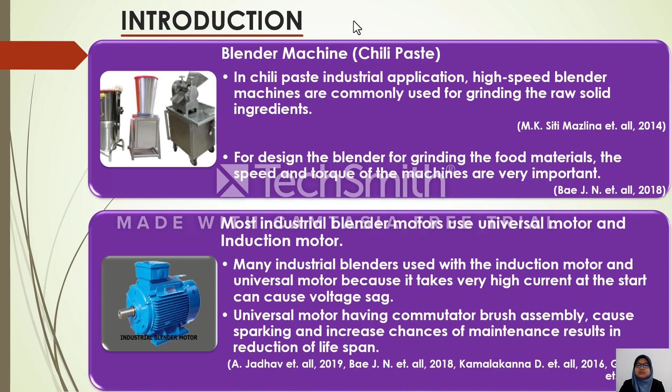Why is the BLDC motor used in this study? Because it is considered due to its high speed performance, suitable for high speed applications of 10,000 rpm to 30,000 rpm, capable of giving the easy speed torque control required for a blender.

Most BLDC motors are used for small applications, which are home appliances, widely used in high-speed blender machines instead of brush motors due to the high efficiency and good performance. Various experiments were carried out on a commercially available mixer grinder for household application.

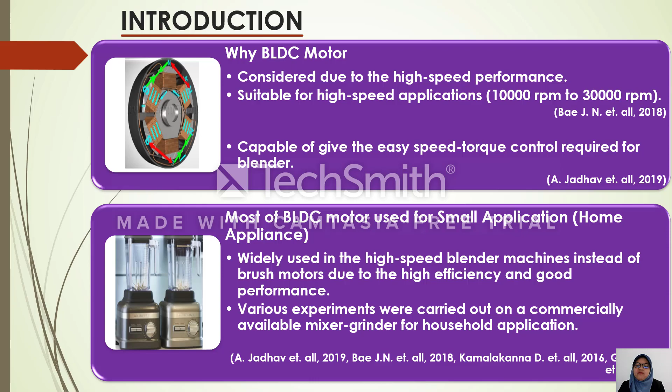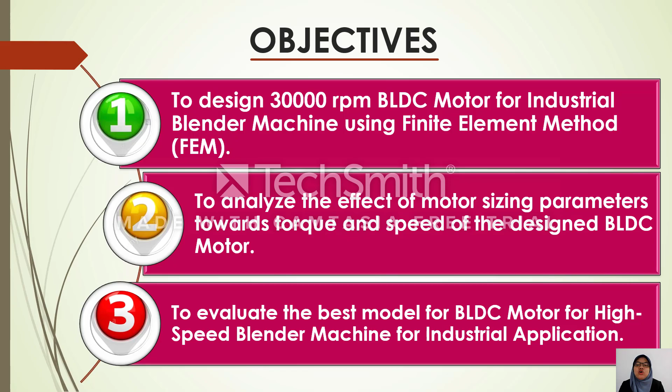These are the objectives of the study. To design a 30,000 rpm BLDC motor for an industrial blender machine using the finite element method, FEM, then to analyze the effect of motor sizing parameters towards torque and speed of the designed BLDC motor, and to evaluate the best model of BLDC motor for a high-speed blender machine for industrial application.

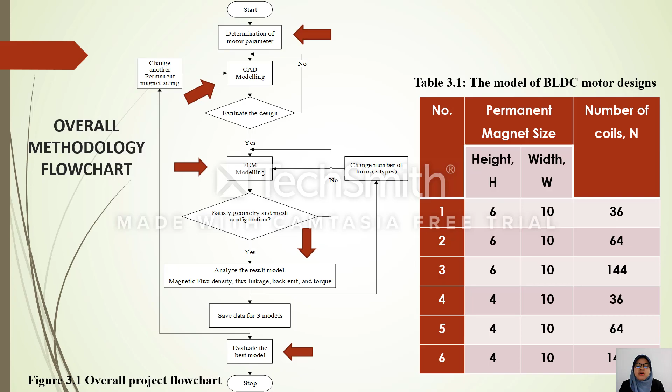So this is the flowchart for the overall methodology to design the motor. In this study, there are 6 designs of motor according to 2 sizes of permanent magnet, and each size has 3 numbers of coil, as shown in Table 3.1. Figure 3.3 shows the measurement of the motor structure design.

Figure 3.2a shows the front view of the motor design. Figure 3.2b shows the side view of the motor design. Table 3.2 shows the BLDC motor fixed parameter specification design, while Table 3.3 shows the BLDC motor variable parameter specification design.

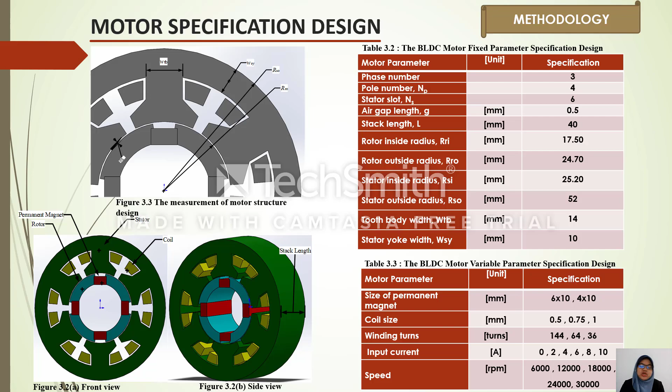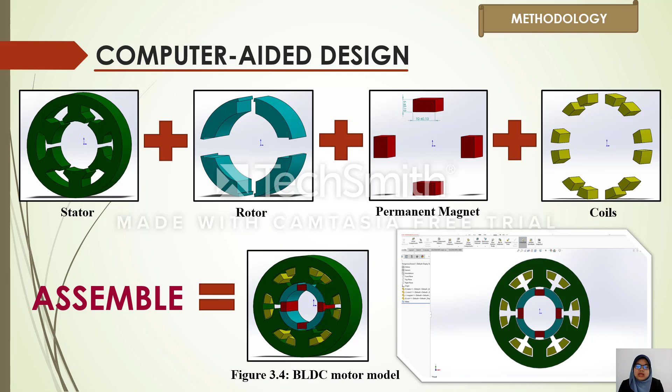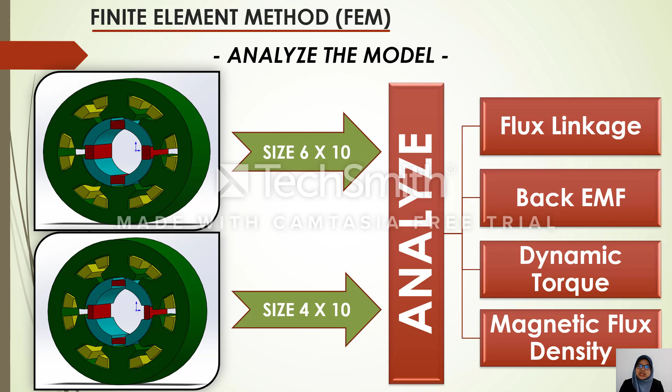Computer-aided design is used to design every single part of the motor structure, such as stator, rotor, permanent magnet and coil, before being assembled as the motor geometry. To operate the motor and analyze all the models, the finite element method is used in this study. In this simulation, the effect of flux linkage was observed for all models with a zero input current condition.

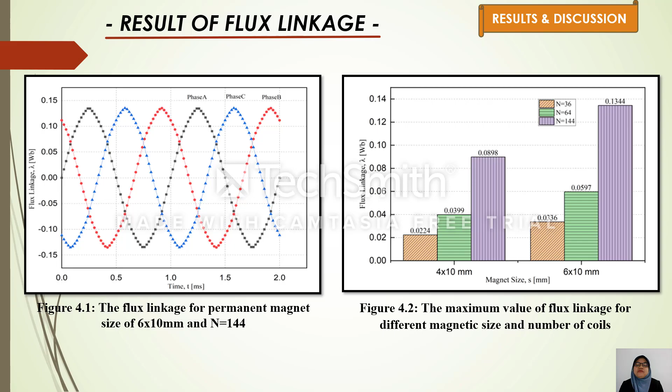The back EMF for all models was observed in this analysis for zero input current. Figure 4.3 shows the motor back EMF at 30,000 RPM for a permanent magnet size of 6 × 10 mm with 36 coil turns. It shows the maximum back EMF achieved in a balanced three-phase sinusoidal waveform at 208.7566 volts.

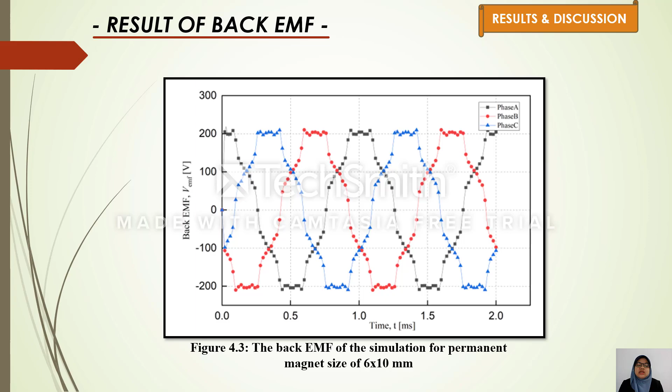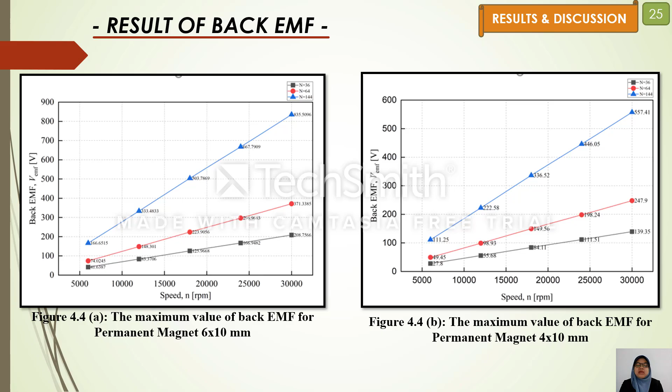Figure 4.4a and Figure 4.4b record the maximum back EMF based on various permanent magnet sizes, numbers of coil, and motor speeds from Figure 4.3. According to the result, the back EMF increases proportionally with the increase of speed, and the size of magnet and the number of turns can also affect the back EMF induced in the motor design.

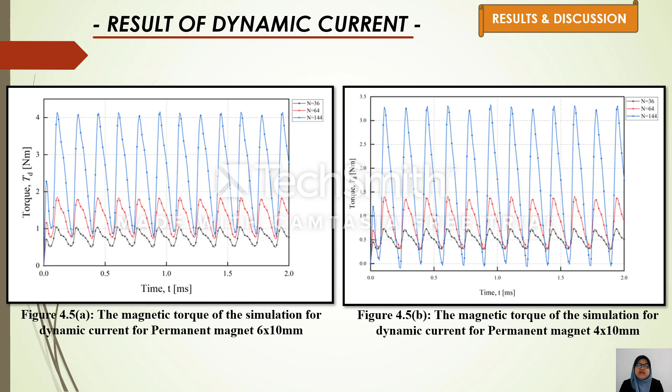The magnetic torque is measured during this process to determine the motor design capabilities. The motor average torque value was measured at a speed of 30,000 RPM, and the current value was adjusted from 0 to 10 ampere. Figure 4.5a and Figure 4.5b show the torque value obtained from the motor design simulation with magnet sizes of 6 × 10 mm and 4 × 10 mm and an input current of 8 ampere.

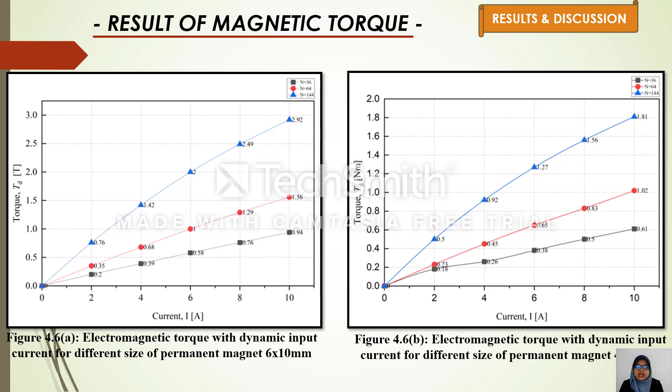For each magnet size, the average torque values for N equal to 36, N equal to 64, and N equal to 144 are measured, and the process is repeated for input currents of 2, 4, 6, 8, and 10 ampere, as shown in Figure 4.6a and 4.6b. The data obtained show that the torque value increases with the increase of three factors: the size of the permanent magnet, the value of the current, and the number of coils.

Figure 4.7 represents the simulation result of the magnetic flux density distribution for a 6 × 10 mm permanent magnet with a 144-turn coil and 10 ampere input current. The highest flux density point is 2.106 Tesla.

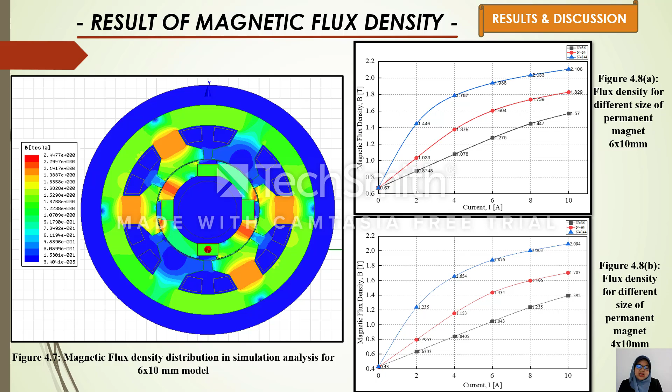Figure 4.8a and Figure 4.8b show the analysis and recording of the highest magnetic flux density for all models. Based on the data obtained from the motor design simulation, the magnetic flux density on the motor stator is determined by three factors. One, the permanent magnet volume. Second, the number of coils, and third, the input current value.

This is the result for the motor selection. Based on the evaluation made, the motor designs for magnet sizes 6 × 10 mm and 4 × 10 mm with 144 coils recorded the highest values in terms of flux linkage, back EMF, magnetic flux density, and torque. However, this design is less suitable because it has a relatively large ripple. Similarly for the motor design with N equal to 64; both designs also have a large ripple.

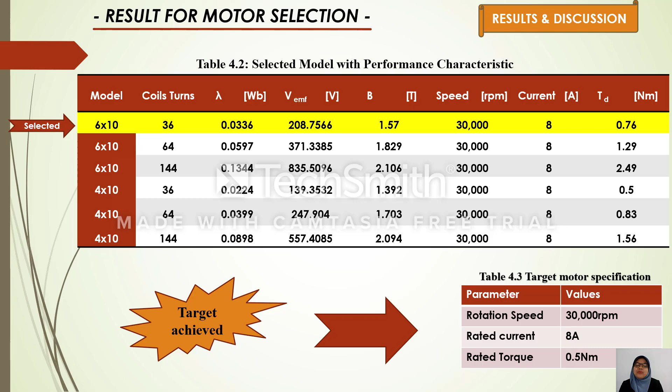The BLDC motor design with N equal to 36 is suitable to be selected because, in addition to achieving the desired torque target, it also has less ripple. Therefore, the BLDC motor design with magnet size 6 × 10 mm and N equal to 36 was chosen because it has advantages in terms of flux linkage, back EMF, magnetic flux density, and torque compared to the BLDC motor with magnet size 4 × 10 mm and N equal to 36.

So as a conclusion, the different number of turns and permanent magnet size will affect the result of flux linkage, back EMF, and torque. The value of torque and magnetic flux density increases if the value of current increases. The back EMF value varies in direct proportion to the motor's speed.